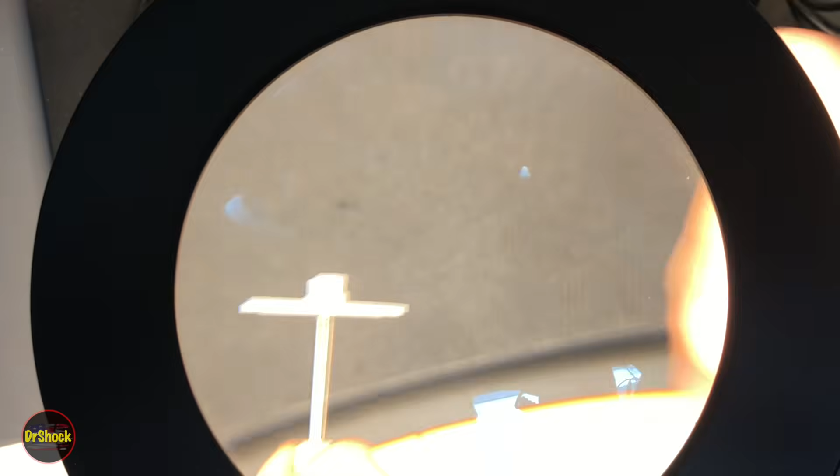All right, guys, in today's video, we're going to be taking a look at a broken gear on this electric motor drive shaft. I'm going to put it under the magnifier here just so it's a little bit easier to see. What we've got is a hairline crack right where you see that dark mark, and that's caused the shaft to turn and the gear slipping now. This is a friction fit type of gear.

And so what we want to do is we want to replicate this, and so today I'm going to show you how you can create a 3D model in FreeCAD that we can use to create a mold to replicate this little gear, this guy right here. He's under too much torque from the motor to 3D print, but we can 3D print a mold, and we can pour a liquid urethane resin, and that'll be a suitable strength material.

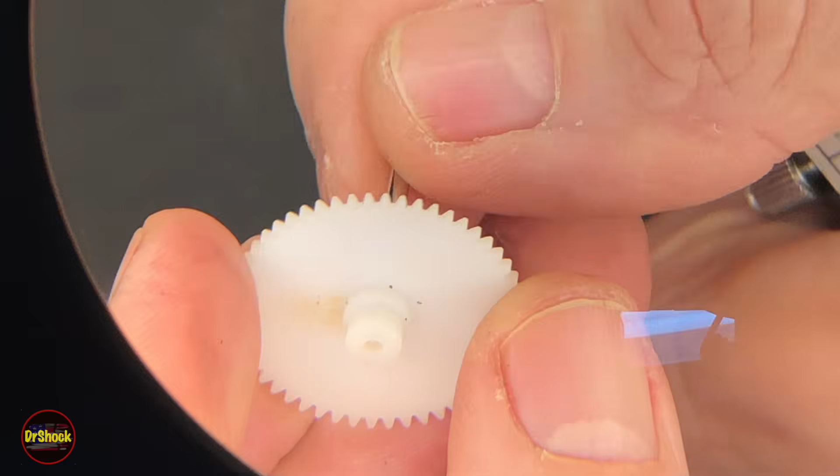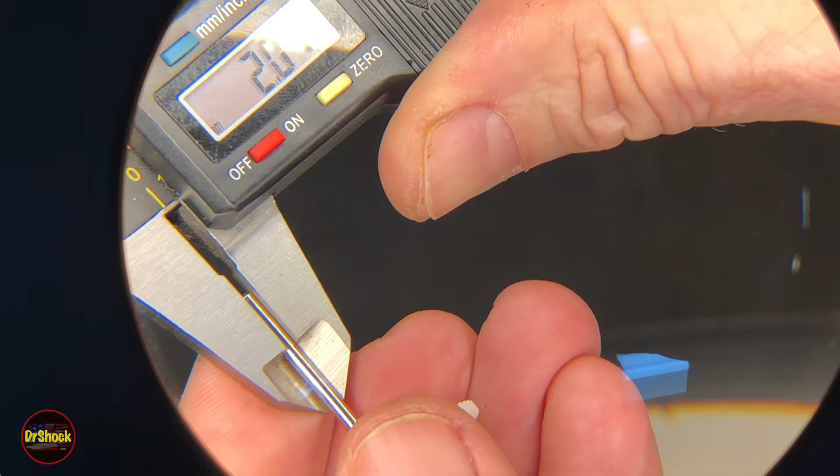So to do something like this, we're going to take some measurements over to FreeCAD. So first thing we're going to need to know the diameter of this shaft. And by the way, this would apply to this little gear, or even if I was doing this really big one. So we're going to come in here, we're going to zero our tool out, and we're going to get a measurement of this shaft, which should be around 2 millimeters for the shaft.

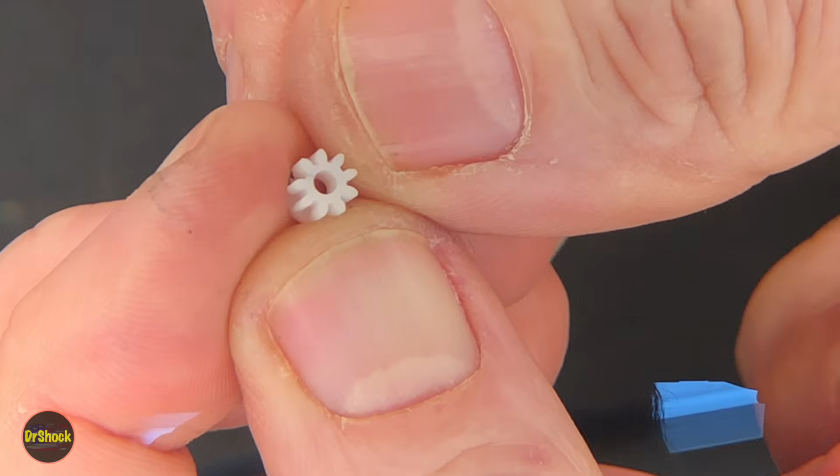Then we're going to come up here with this little gear and count the teeth. Now on one like this, it's pretty easy. 1, 2, 3, 4, 5, 6, 7, 8, 9. But whatever you've got, if you got one like this, it's going to be a little bit more difficult to count. But you need to count the teeth. That's one of the things we need to take over to FreeCAD.

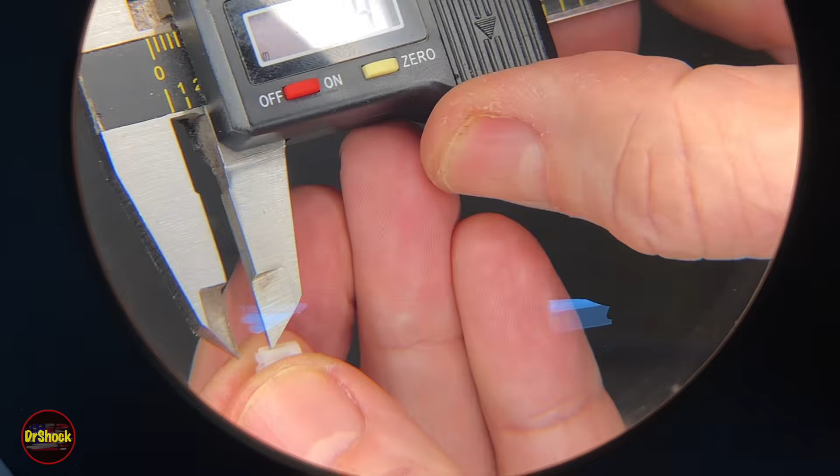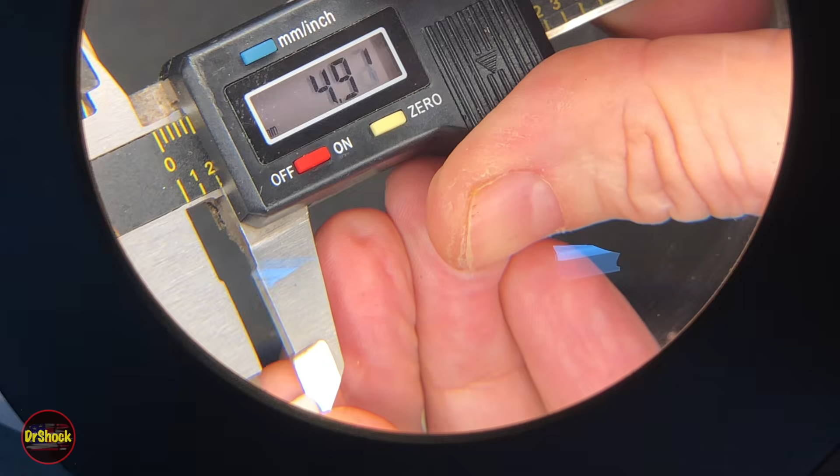The other thing we need to measure is the height of this gear. So again, we're going to zero our tool out, and we're going to measure the height of this gear. It looks like right around 5 millimeters. This particular tool has a habit of getting a little bit off on me, but I'm going to go ahead and call that 5 millimeters here.

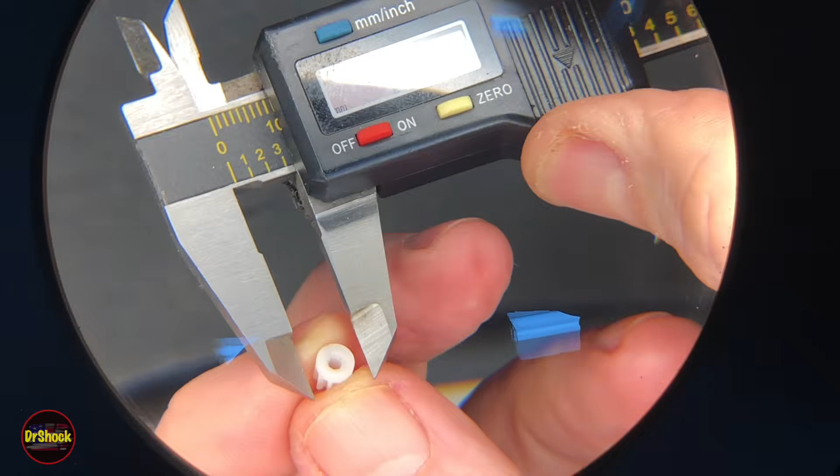And then the next measurement I'm going to need is the width. Now this is going to be kind of off because of the crack, so we're going to want to squeeze this guy. And if we look at this, we can see this particular gear has got a design where the teeth don't go all the way through. There's like this little cylindrical ring at the bottom. Not every gear is like this. This is like a spacer. In this case, we'll measure that.

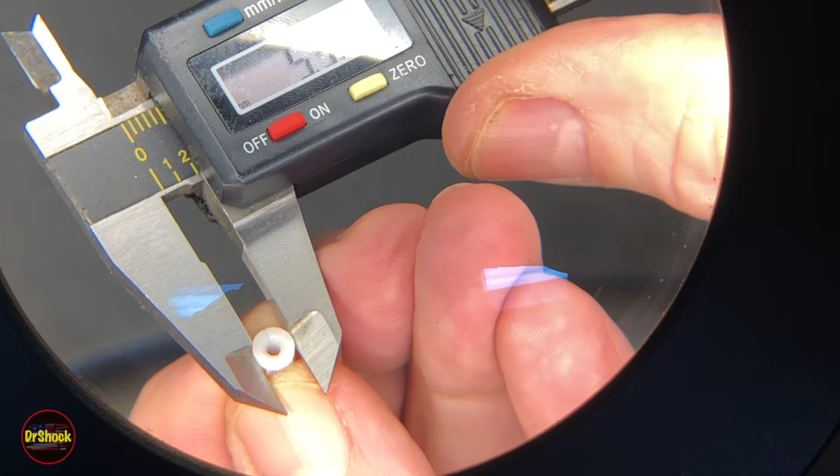It's just under 5.4. And I think with the crack we've got going there, if I squeeze it a little bit and you take a different measurement, that's the problem with something that's broken, is it flexes. I'm going to call that 5.4.

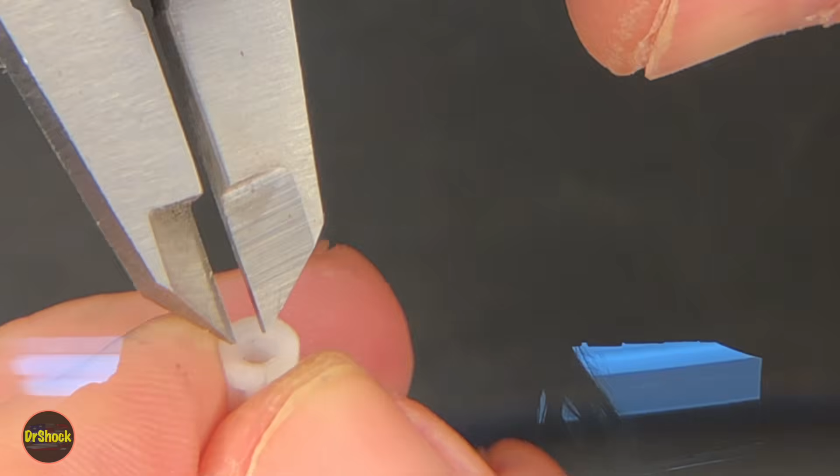So now we've got the height, we've got the gear count, we've got the size of the hole for the shaft. We can see on the bottom here, if we zoom in a little bit, I don't know if you guys can catch this, but there's actually a little chamfer cut in where the hole goes. And since we're going to cast mold this, we can capture that as well. It's very, very small. It's less than 1/2 millimeter of a chamfer, maybe 1/4 millimeter. So I'll show you in FreeCAD how we can capture that as well.

The last thing we'll need to take over to FreeCAD is if we look at these teeth. These are really small, but I get it against my finger so it's on a darker background. The teeth kind of go up and over. There's an angle to the cut, like a pitch to it. That's called the module. And we're going to need to know what that is.

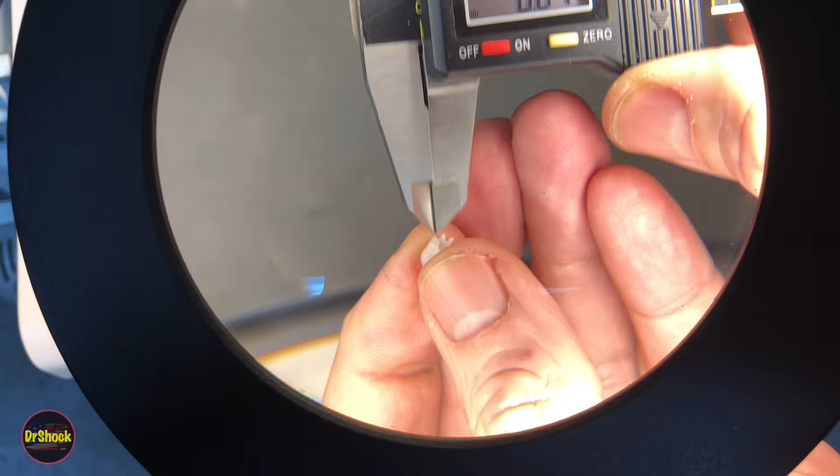Now this is really going to be hard to do with such a small gear, but if we kind of estimate this, I'm going to say it's like 1/2. Just going to guess that this little piece here is like 1/2. When we get into FreeCAD, I'll show you what we're talking about here.

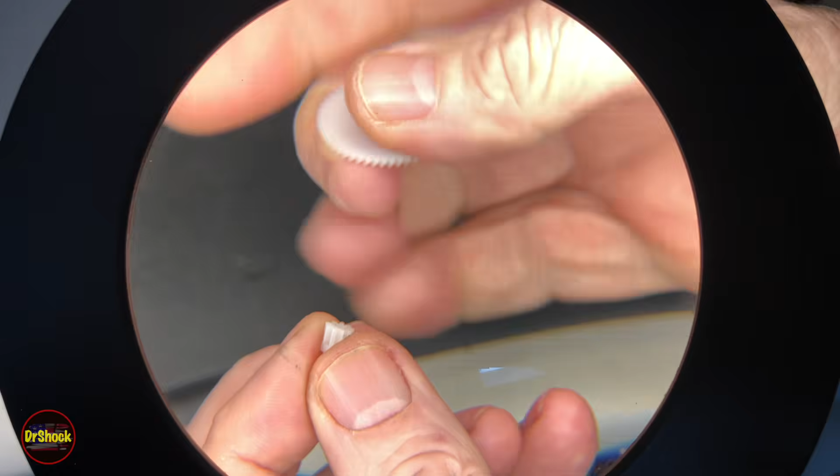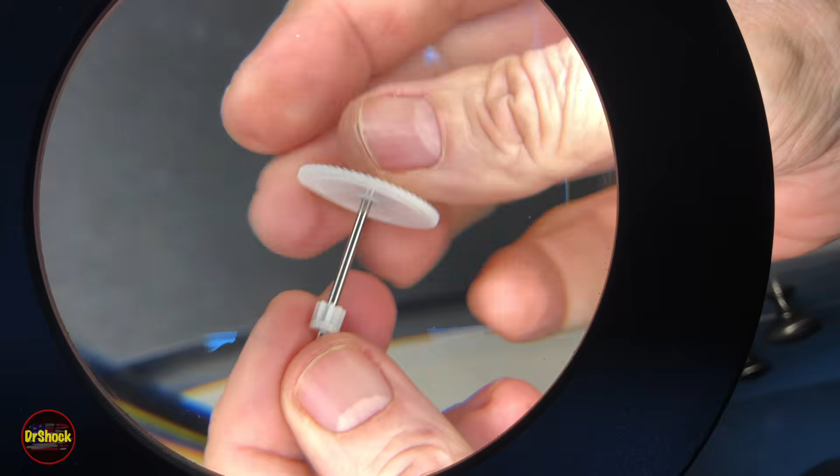And then the hope is that we can quickly cast a replacement. We can freeze the shaft. We can put the replicated gear in some boiling water. We'll be able to press fit it back on there, and we'll be back in business within 48 hours versus the time it would take us to order a replacement gear. So let's head over to FreeCAD, plug all this data in, and get a model.

All right, guys, we're sitting here in Windows. We could just as easily have been sitting here in Mac OS. And we're using FreeCAD 1.0.2. It's available for both operating systems. I've got another application here in the back that we'll use to test the model when we're done. But let's just go ahead and get started.

I'm going to get rid of this welcome to FreeCAD thing and this little piece here so that we're all clean. Leave this model and task view, though. Don't X this out. So getting in and out as fast as we can, we're going to create a new empty document. Once we have that, we're going to create a new part. Once we have our part, we're going to create a new body for the part. Once we have the body, we're going to go into part design, and we're going to pick the involute gear function. And this is where the heart of this whole FreeCAD software is.

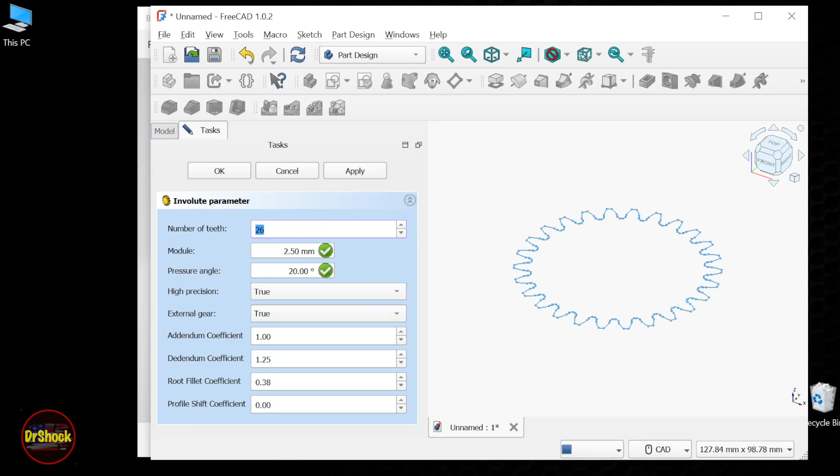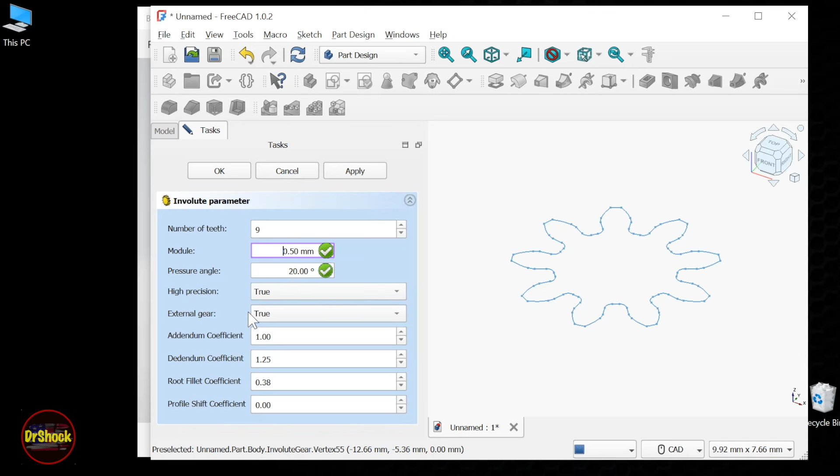And we only need two values: the number of teeth that we physically counted on the gear. And then remember, I was mentioning about the module, which is like this pitch angle on the teeth. And we guesstimated ours at 0.5 millimeter. And I recommend that you type the way I'm typing here rather than selecting all this and then trying to zero it out, because for whatever reason, this involute gear feature, both on Mac and Windows, in my experience, if there's a value that is not greater than 0 in here, the app will crash. So just to try to avoid that, you'll get like a pop-up, a divide by 0 kind of error.

All right, hit OK. And now we've got a two-dimensional representation of the gear. We're going to make sure the gear is selected, and now we want to make it three-dimensional. So we're going to extrude out the height. We're going to use the pad function for that. We measured our gear as 5 millimeters in height. So when it looks at this length parameter for the dimension, we're going to enter 5 millimeters and then hit OK again.

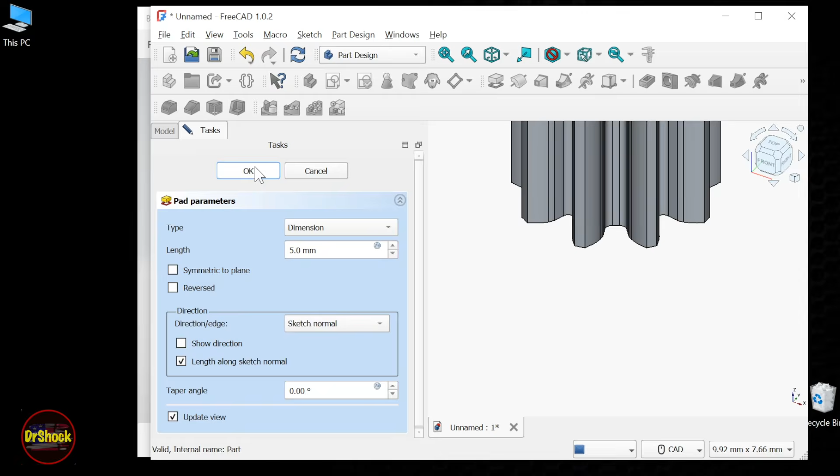Now in the Windows version, I'm going to tap this field and use the down arrow key to bring this into view. The Mac version is a different key sequence, but just to get it where we can see it. And so if we just had a simple gear, we're ready to drill the hole and be done with it. But our particular one had a section at the bottom where the teeth did not cut all the way through, if you recall. So we're going to add that attribute now. So I'm going to go back into part design for this gear, and I'm going to create an additive primitive in the form of a cylinder.

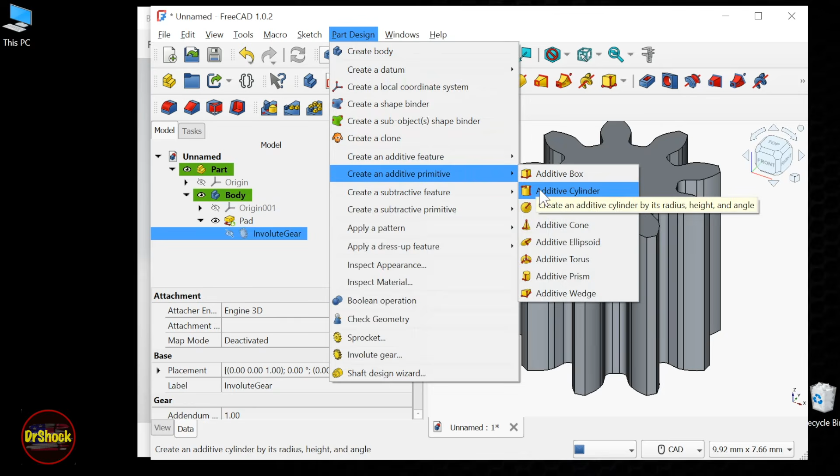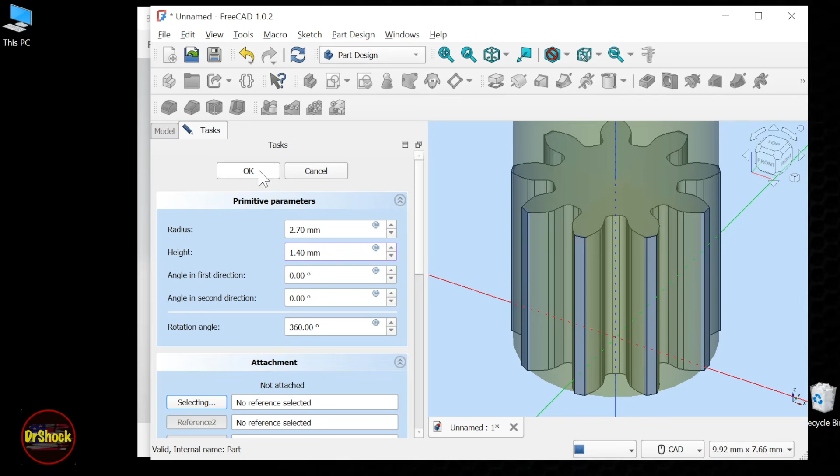Now, we measured the diameter at 5.4 millimeters on this particular gear, so the radius is going to be half that, or 2.7. And we measured the height of this cylindrical portion of this gear as roughly 1.4 of the overall 5. And with just those two parameters, we're going to hit OK. And we're kind of getting there. But what we can see is our teeth are sticking out too far. So we know this module is off slightly, like I was telling you it might be.

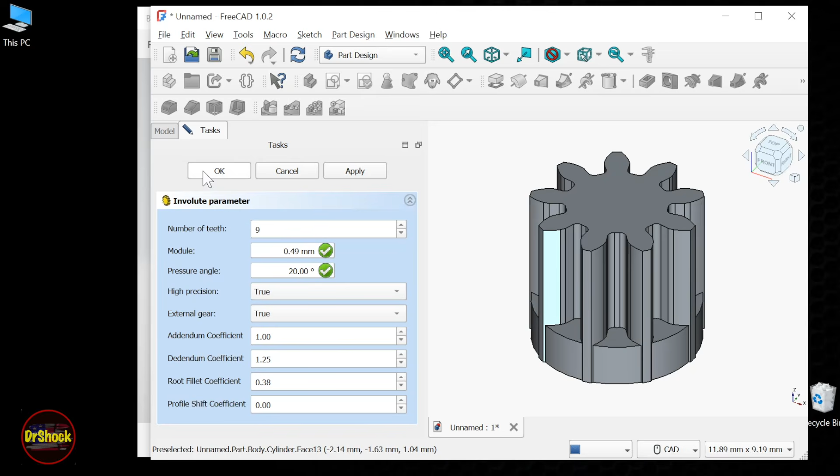So we're going to go back into the gear by double-clicking on it. And we're going to tweak this value. And again, without having it go to 0, I'm going to try 0.49 here. Probably could even do 0.495. I'm going to hit OK, and we should see this disappear. And it did. So now we've trimmed that up.

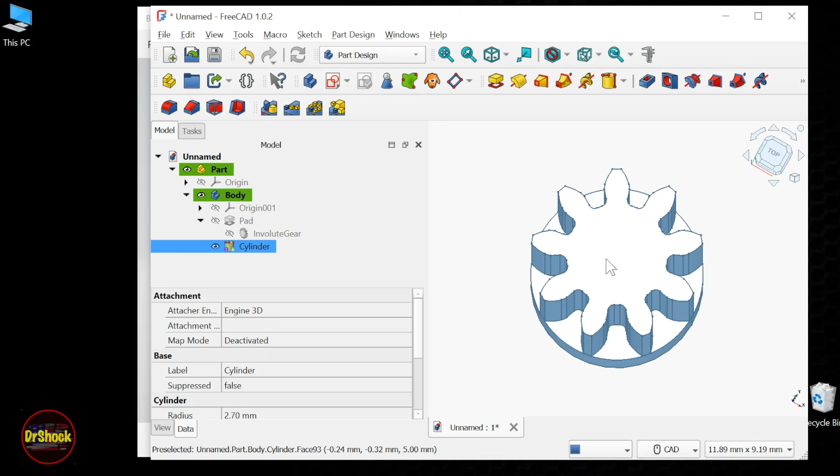So now let's get the hole for the shaft drilled. So our shaft was roughly 2 millimeters. So we're going to click on the surface of this gear. And I clicked on it again by mistake. Sorry about that. You only want to click on it once or it'll select the whole thing. Then we're going to do Create Sketch.

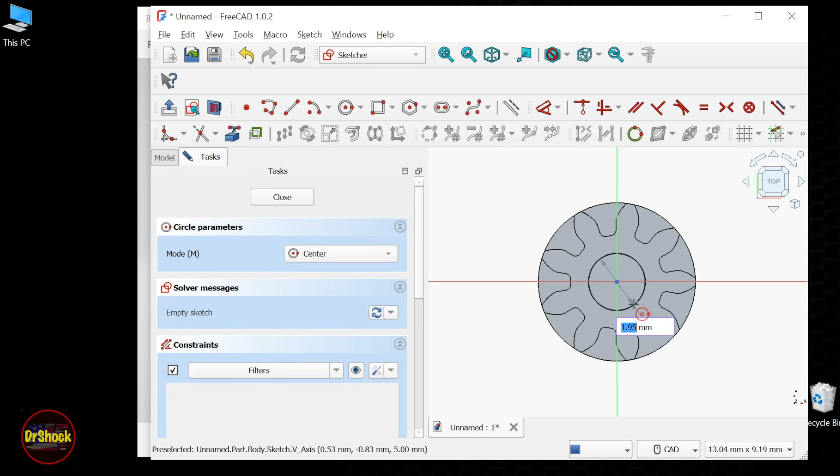And it's going to give us kind of this XY coordinate. And then this type of sketch is going to be create a circle by center. And then we're going to go dead center here with the little crosshair. And we're going to make this hole be just shy of 2 millimeters so that we have a friction fit. So let's say, like 1.95. And then close this. All right, so now we've got this hole here with the sketch.

Now with that sketch selected, we need to drill this out. So we're going to drill this out using the hole function. So you can click on the hole function. Here's another problem with the code. But again, free software, right?

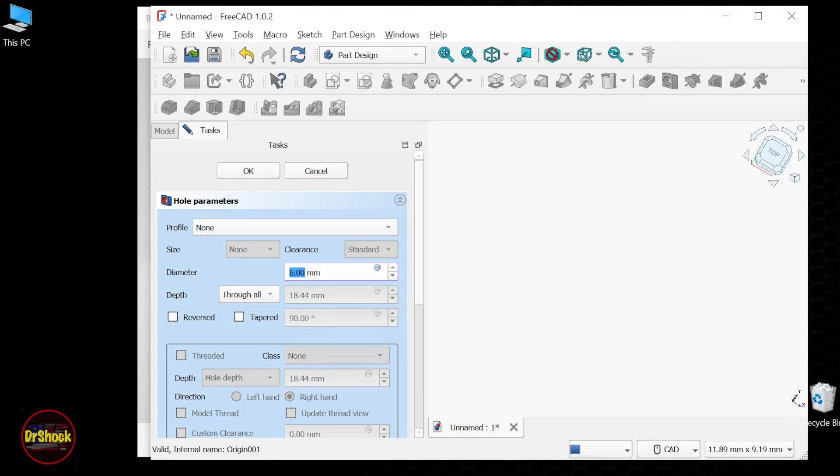You're going to have to deal with some of this kind of stuff. I just ignore all of these things. You want to set the depth to be through all. We want the hole drilled through the whole thing. Now, unfortunately, this hole parameter module doesn't pick up the diameter of the circle that we drew in the sketch. So we're going to have to type that in again as a diameter, 1.95 millimeters. But we can leave everything else defaulted and hit OK. And now we've got our hole drilled through it.

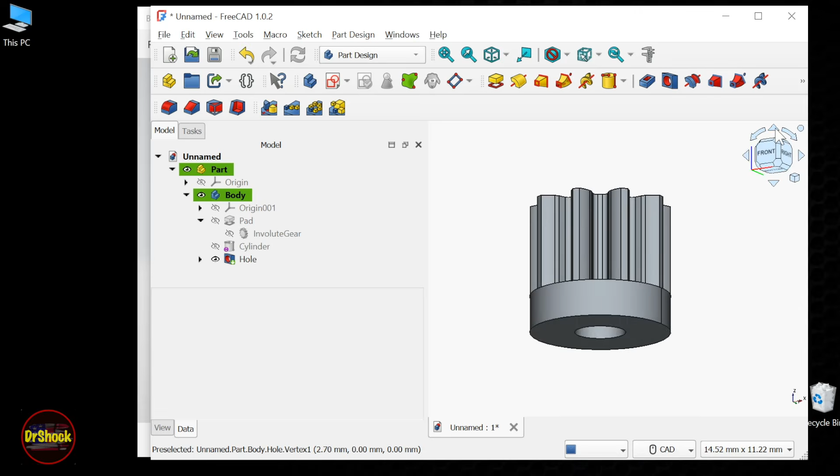It's still complaining about something. I'm just going to cross that out again. It's just how it is in this 1.0.2 version. I see more errors on the Windows version than the Mac version, to be honest. And now we're really roughly done here. If we were just going to try to 3D print a larger gear in nylon, we could be done.

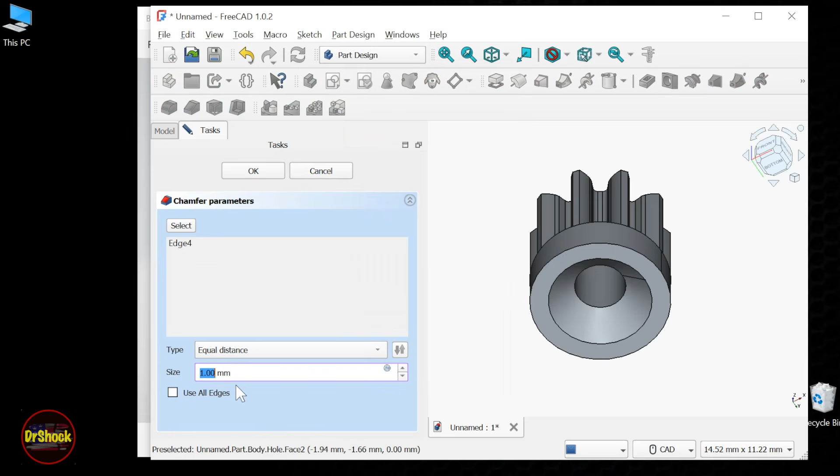But the smaller one, since we're using it to make a mold, we're going to capture that feature we had at the bottom where it was chamfered. So we're going to go back to Part Design after selecting that, and we're going to apply a dress-up feature of a chamfer. And it looked like it was about 1/4 of a millimeter, but we'll go 0.3. Hit OK. And now we are done. We've got this part that I showed you earlier completely modeled in just a couple of minutes.

So now we want to export this. Now, making sure that the body is selected. Don't just get one of the individual parts. We want the body, and we want to get all of these pieces and components in there. Then we can come up to File, Export. And the default is 3MF. But if you go in here, some software wants IGES, some might want STEP. It depends on what you're using.

I'm going to leave it at 3MF, and then I'm just going to say small gear as our file name, and we're going to save that to the desktop. And there it is right there. So now I want to test this. Now, in Windows, I can see the hole in the icon that was used. The icon was created from the 3D model, as you can see. But I want to make sure that's actually there.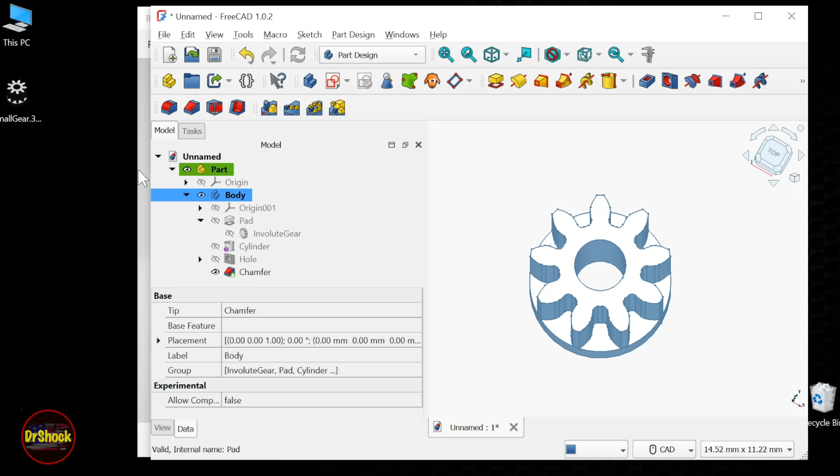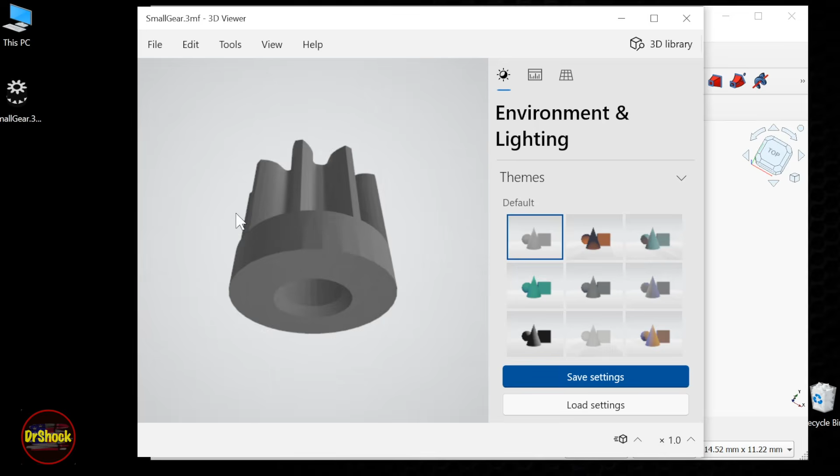So I'm going to come over to this software, which is 3D Viewer, which is a Microsoft app. And it's free in the Microsoft App Store. And I'm going to open this 3MF file. And I'm going to make doubly sure that the hole and the chamfering and everything that I expect to be here is as I expect it. Sometimes what you'll get is the hole will be missing, and that usually is because all of this componentry wasn't in the selection for the export. So that's why I like to physically click on the body in the model view here before I do the file export. And then I also like to test the model.

If you're using macOS, you find an app in the macOS App Store, or there's a couple of free online 3D viewers that you can use to test that you have this right before you pull it into your slicer software for the 3D printer in order to make the reverse image of this, which will be the mold so that we can pour the resin.

Like we discussed earlier, in this particular example, this gear is too small for its application, needing high torque and high RPM on an electric motor. It cannot be 3D printed. With a 3D resin printer, the resin material will be too fragile and will disintegrate, and a filament printer will not hold up to the torque. So in both cases, we're better off just using a 3D printer to make the mold and pouring a resin that's a more accurate representation of the original injection molding that was done on the part to begin with. But if you have a larger gear, then it would be suitable for you to 3D print that with the appropriate filament type of plastic.